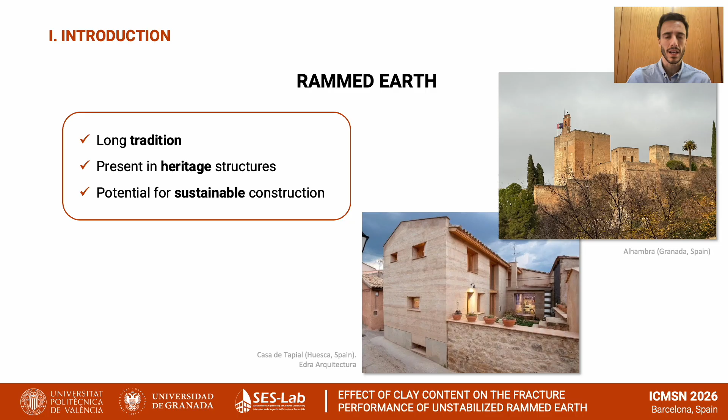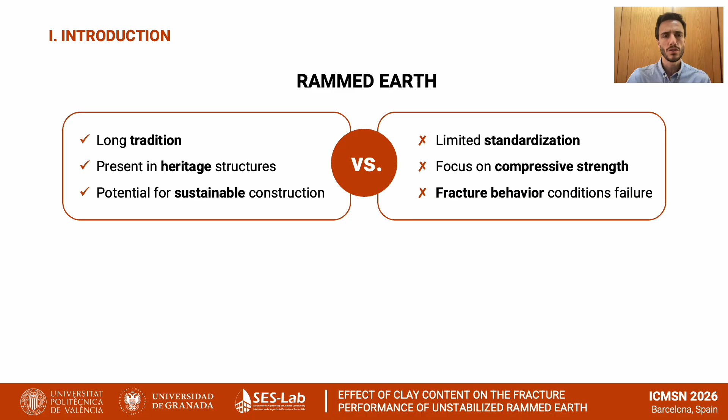However, and despite its growing interest, rammed earth remains a material with very limited standardization, which hinders its wider adoption in modern construction. Furthermore, most existing studies focus primarily on the compressive strength of the material, whereas fracture behavior is known to play a crucial role in the failure mechanisms of this type of structure, particularly when it is submitted to very high loads like seismic loads.

Against this background, the aim of the present study is to evaluate the fracture behavior of rammed earth and, more specifically, to investigate how clay content influences its behavior. In unstabilized rammed earth, where no cement, lime or other stabilizers are added, clay acts as the only binder in the mixture. Therefore, it is reasonable to expect that clay plays a significant role on the fracture performance of the material. Our objective was also to determine whether fracture behavior can be predicted as a function of clay content, and also to complement this evaluation using non-destructive testing techniques.

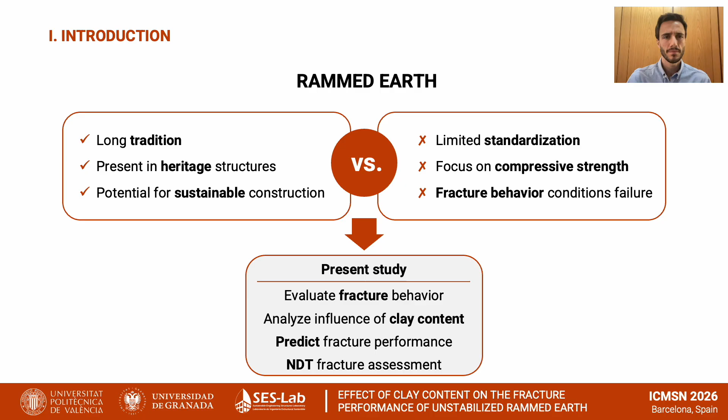To achieve this goal, 4 soil mixtures with increasing clay content were selected, ranging from 25% clay in soil A to 100% clay in soil D. Typical clay contents for rammed earth construction generally range between 25 and 40%. Therefore, soils A and B represent realistic construction materials, soil C has an excess of clay, and soil D, consisting entirely of clay, is not practical for rammed earth, but it was included here just as a reference material for comparison purposes.

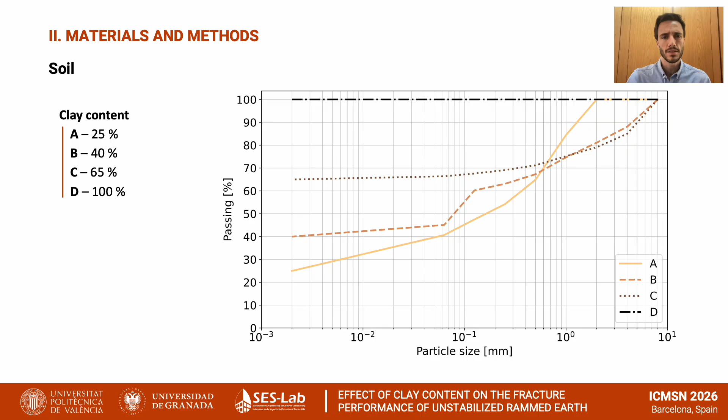Using these soils, prismatic specimens were manufactured, with 5 specimens produced for each series. The specimens were manufactured mixing the soil with its optimum moisture content, obtained through proctor tests, and compacting the mixture of soil plus water into 3 layers.

The specimens measured 10 per 10 per 45 centimeters and were tested under 3-point bending tests, which is a standard method for evaluating the fracture behavior and fracture energy in quasi-brittle materials. The support span was set to 40 centimeters and a vertical load was applied at the top.

In the absence of specific standards for rammed earth, the concrete standard EN 14651 was adopted together with recommendations available in literature. As shown in the image, all specimens were notched at mid-span with a notch depth equal to 1/3 of the specimen height.

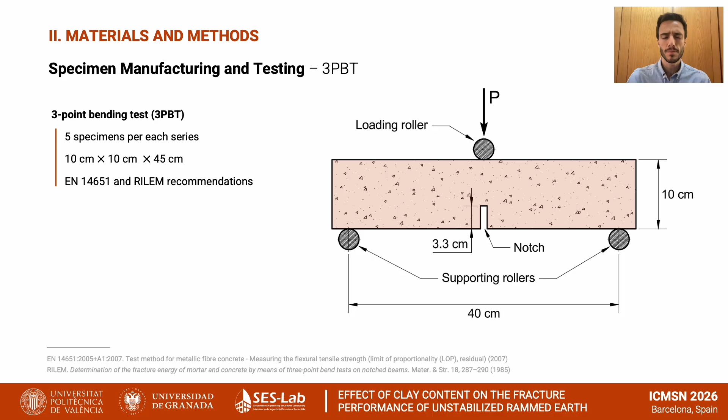Here you can see a photograph of one of the specimens immediately before testing.

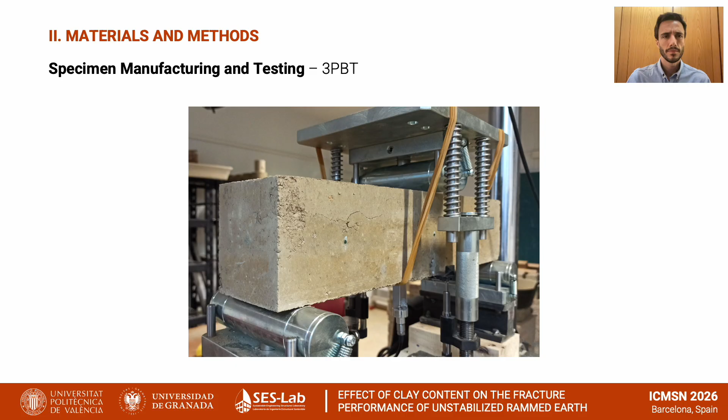Regarding the non-destructive testing program, two techniques were employed. First, free-free resonant column tests were performed. This method allows the determination of the dynamic elastic properties of the material by mechanically exciting a specimen of known geometry. The test was performed in longitudinal, transverse, and torsional vibration modes, as you can see on your left.

Second, ultrasonic pulse velocity tests were carried out in which the propagation speed of acoustic waves through the specimen can be measured. This velocity of the waves depends primarily on the material's density and stiffness. Ultrasonic pulse velocity tests were carried out in this case in longitudinal and transverse directions.

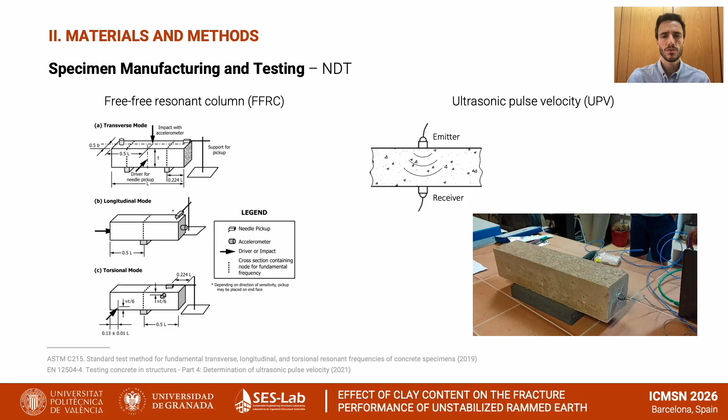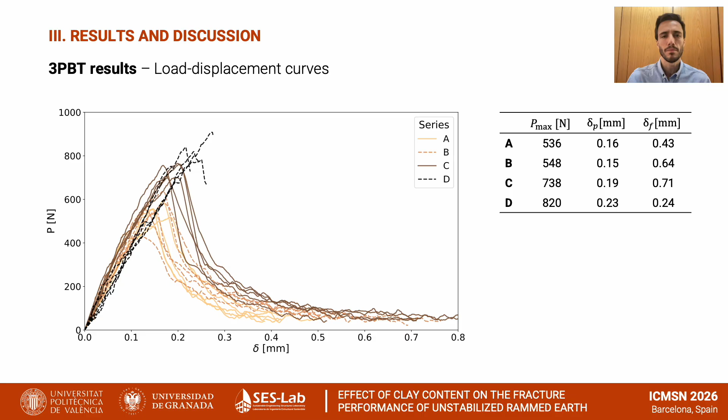The maximum load rises from 536 Newton to 820 Newton, an increase of 53%. It should be noted that for Series D, composed of pure clay, the post-peak response could not be recorded during the test because the specimens failed in a brittle manner immediately after reaching the peak load.

The most important parameter obtained from these tests is the fracture energy, GF. This parameter is defined as the ratio between the work of fracture and the ligament area. The ligament area corresponds to the cross-sectional area of the specimen above the notch, while the work of fracture is calculated as the area under the P-delta curve.

Because experimental measurements do not capture the entire tail of the curve, an additional correction must be applied to account for the unrecorded portion. The methodology proposed by Elices in 1992 was adopted for this purpose. As shown in the graph in red, fracture energy increases significantly from approximately 16 Newton per meter to 26 Newton per meter when clay content increases from 25 to 65%.

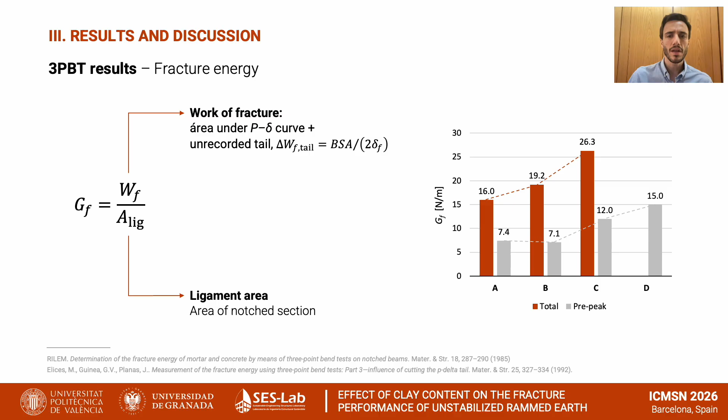Since the post-peak behavior of Series D could not be measured, a partial fracture energy calculated from the beginning of the test up to the peak load was also defined for comparison. In this case, a marked increase can be observed also, in grey in the graph, for specimens with high clay contents, particularly Series C and D.

The next objective of the study was to develop a model capable of predicting fracture energy. Based on the experimental P-delta curves, shown again in this figure, a piecewise analytical function was proposed. This function consists of a linear segment representing the initial hardening branch up to the peak load, followed by an exponential function describing the softening branch.

The model depends on three fitting parameters: K, representing the slope of the linear branch; delta P, defined as the displacement at peak load; and alpha, which defines the shape of the exponential branch.

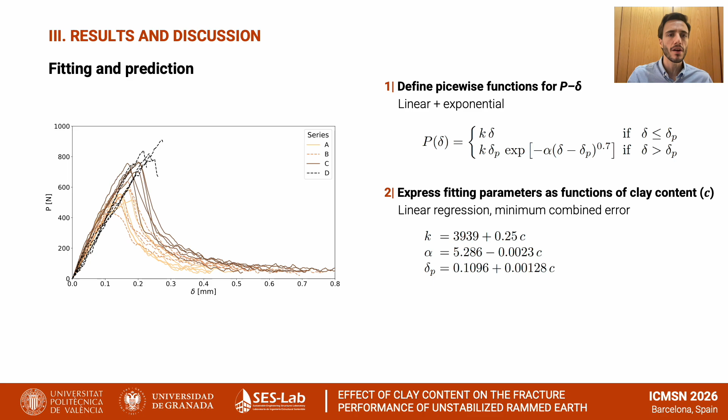These three fitting parameters were subsequently expressed as linear functions of clay content through a regression analysis that minimized the combined fitting error across all four series A, B, C, and D. The resulting expressions are shown on the slide.

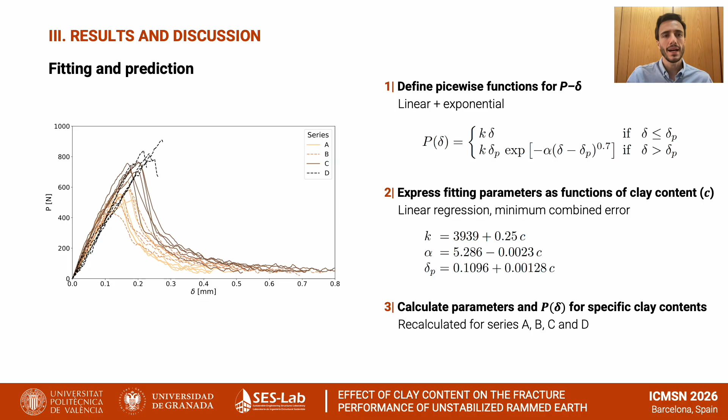Using these relationships, the fitting parameters were calculated for the clay contents of the series, meaning 25, 40, 65 and 100%. And then the corresponding analytical P-delta curves were generated.

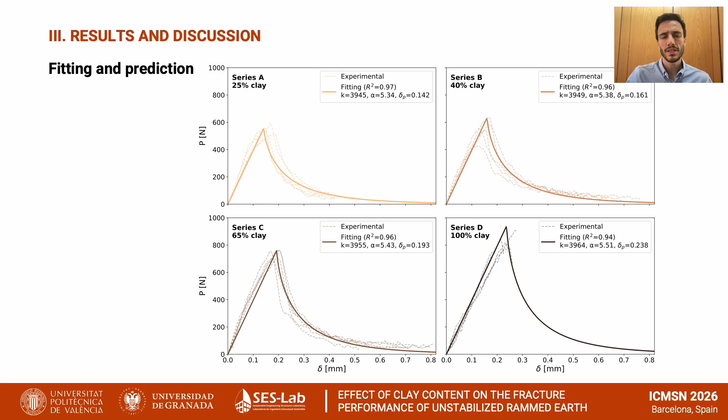The comparison shown here indicates very small differences between analytical and experimental results. Peak load differences range from 3 to a maximum of 15%, while fracture energy differences remain always below 5% for all series. The model allowed us to estimate the total fracture energy of Series D, which could not be calculated experimentally due to the brittle failure of the specimens after peak load.

A value of 34 Newton per meter was obtained. This is the maximum of all four series.

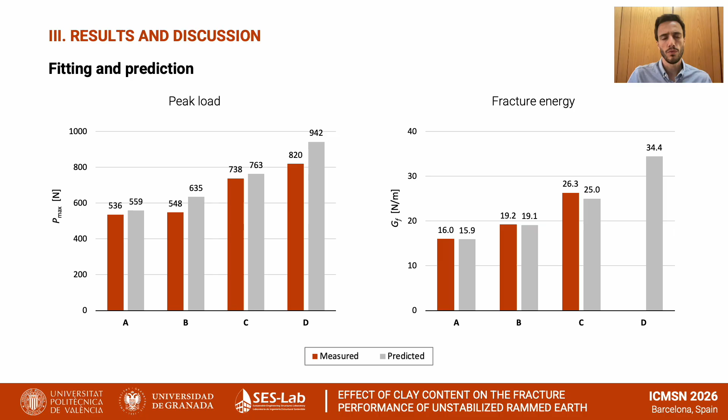Furthermore, the model can be used to predict the entire P-delta curve and the corresponding fracture energy for any clay content from 0 to 100%. As shown on the left, the initial slope varies only slightly between clay contents, whereas significant changes are observed in both the peak load and the softening branch.

By integrating these curves, the fracture energy can be obtained directly as a function of the clay content. This is illustrated in the graph that you can see on your right.

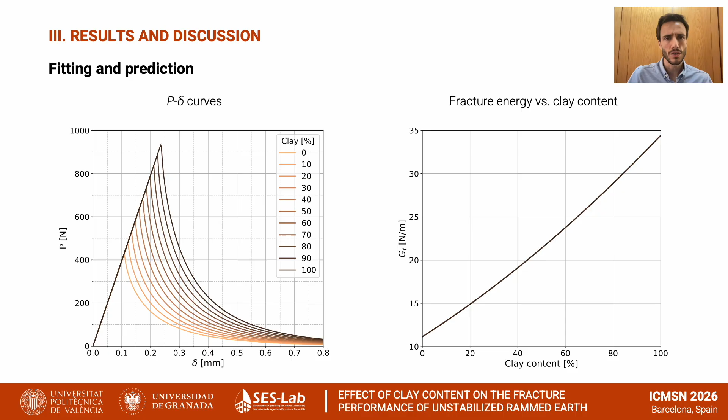The final stage of the study was focused on correlating the results of the non-destructive tests with the fracture energy, which was selected, as previously stated, as the main indicator of fracture performance.

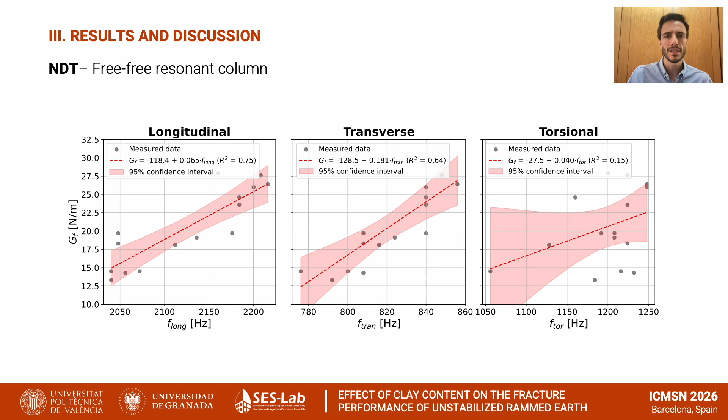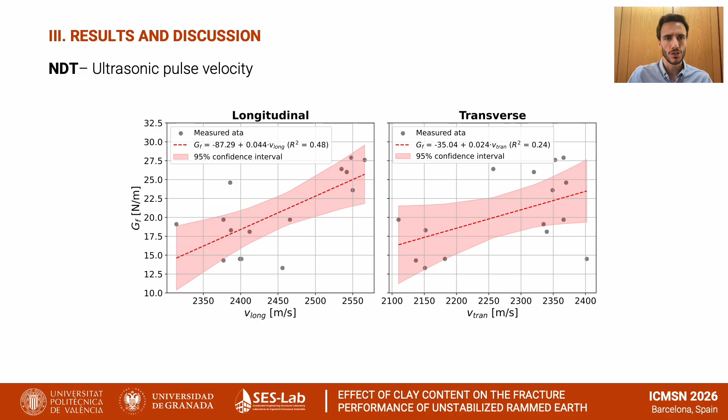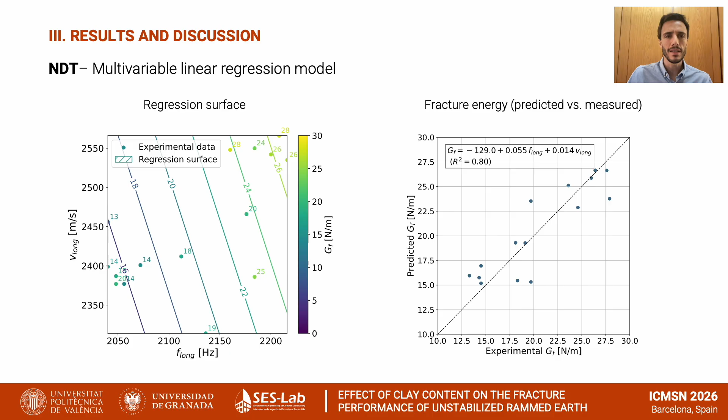However, when a multivariable linear regression was performed using the longitudinal results from both non-destructive testing methods, the predictive accuracy improved considerably, achieving a coefficient of determination of approximately 0.80. To conclude,

The results of this study demonstrate that clay content has a clear influence on the fracture behavior of unstabilized rammed earth. Increasing clay content leads to higher peak loads, greater ductility, and increased fracture energy.

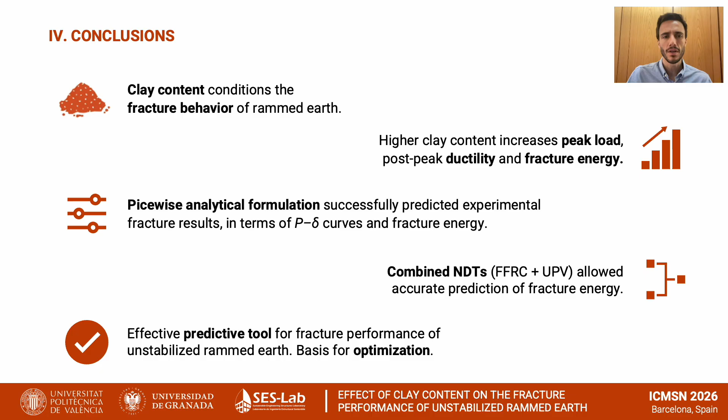In addition, a piecewise analytical formulation was successfully developed and shown to accurately predict both the P-delta curves and the fracture energy. The results also indicate that combining non-destructive testing techniques provides a reliable means of estimating the fracture energy of rammed earth. Overall, the findings of this study provide an effective predictive framework for assessing the fracture performance of unstabilized rammed earth and may serve as a basis for future material optimization and design approaches.